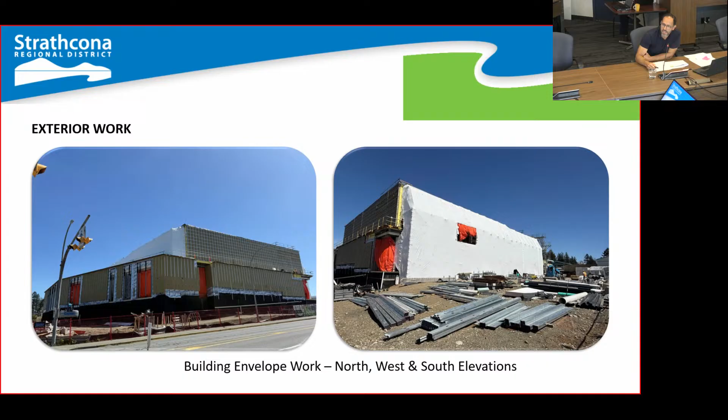The frames are about to arrive for the south side, and the windows are planned to arrive within the next 4 weeks, so a lot of work is happening on the exterior. You can see on the left side that the frames are being installed adjacent to Pinecrest and on the lower part of the natatorium.

Roof construction continues. We're 95% complete. The weather finally got better, so these guys are planning to come and finish all this work within the next couple of weeks.

The parapets are being built at this time, and drains are being installed, so soon all this work will be done.

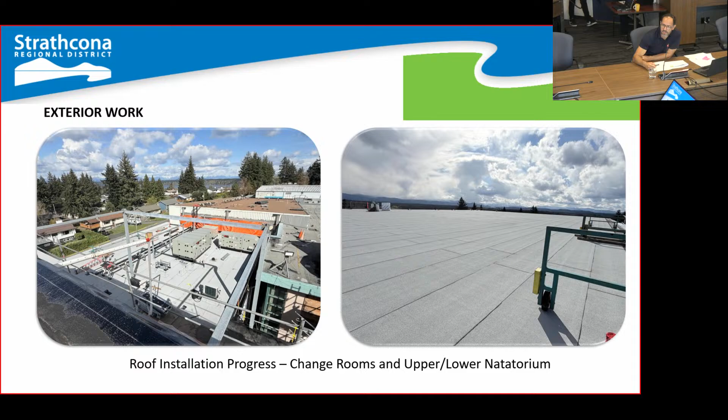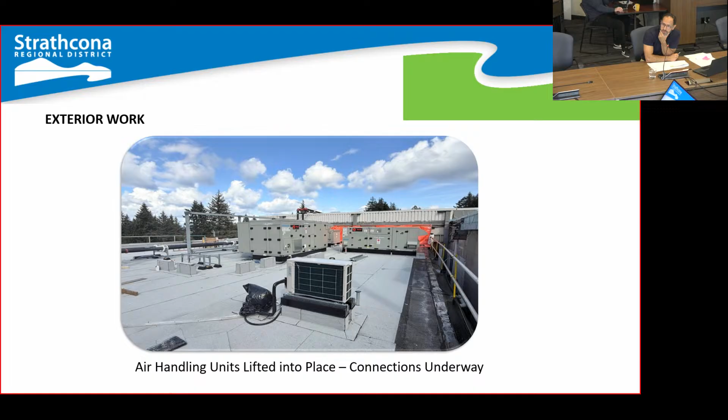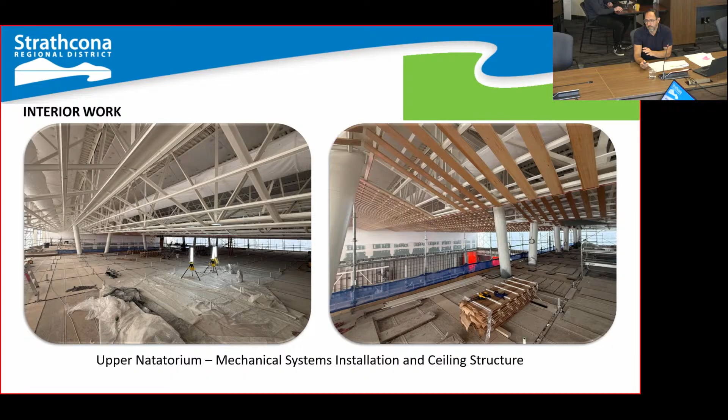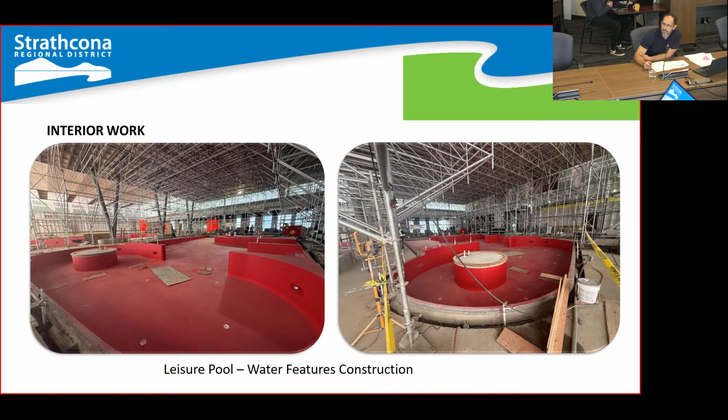Lessons learned from the lap pool, I'm going to speak about some of the issues we encountered and how things are getting resolved. This is going well, so the sequence has been changed. I anticipate that this pool is going to start getting tiled pretty soon, within the next week or two, no later than that.

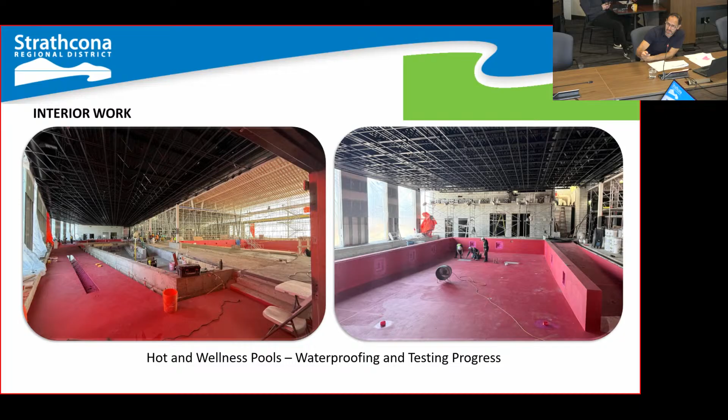I would say that it's really normal to find these kind of things, which is why we proceed with testing before we actually put any tile. After investigation, the leaks were detected close to the drains in the deepest portion of the lap pool. So they cored some holes, removed some of the thin set, and replaced the drains as well. The drains are holding water right now, so that testing is coming really good.

They're also working on plugging some of the penetrations for the light fixtures that go in the pools. They did that procedure with the wellness pool and it worked really well. Now they're following the same procedure here in the lap pool to hopefully rectify any of the issues we have. Filling this lap pool will happen next week, and we're hoping to get positive results so we can start tiling as well. These two images are both for the lap pool.

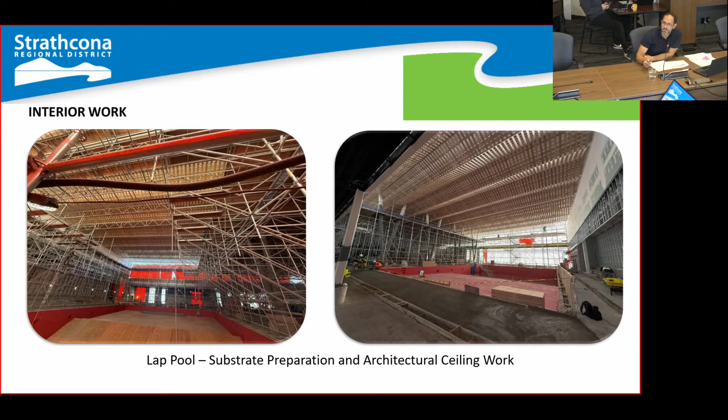You can see on the right photo that on the deck they're putting the thin set, that dark layer you see is kind of grout. I guess the goal is while they deal with all the leaks of the lap pool, they want to start tiling around the perimeter of the pool to gain some time. So they have changed the sequence. This is not what they initially had, but they had a plan B, and they are following that.

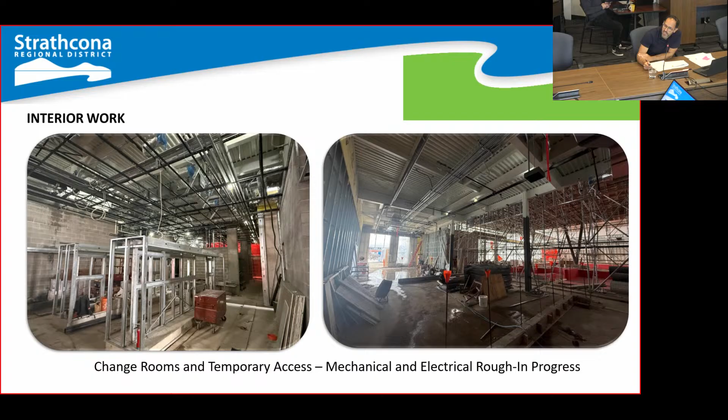In the technical corridor or basement, you have the opportunity to see the amount of work going on in these areas. All these spaces are filling up with all types of pipes. We have pool pipes, supply and return. We have HVAC ducts, fire suppression system, electrical, and a lot of the equipment related to the pool.

Some little packages for the pumps, heat exchangers, and the UV systems that will treat the water are under approval. We anticipate that all that is going to be on site within the next weeks and installed following commissioning.

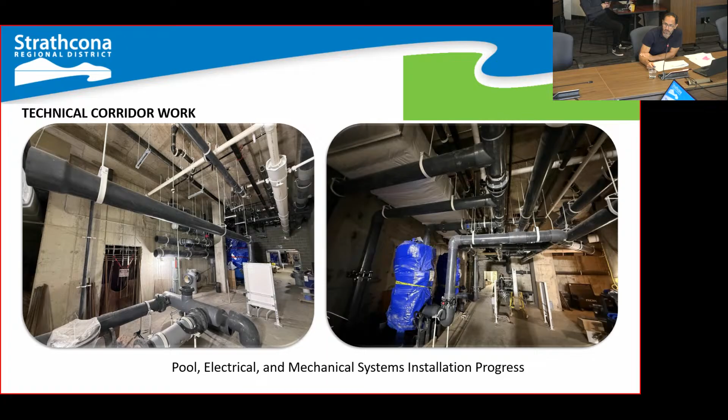I'm going to go quickly here through a lot of the work that is coming up because there is a lot. We only have 4.5 months. So curtain wall frames, anything related to those frames for the windows you saw in the first image I projected, that installation continues and goes to the end of June.

Glazing, all related to the glass, is scheduled to start this coming month in May and go through June. End of June you will see all those windows there. Metal cladding will follow as well, scheduled to start in June and completed in July.

That follows a test that has to be done with air tightness, which is something we have to procure and hire a professional to do the testing to make sure it meets the requirements of the energy model and the requirements of the City of Campbell River. Then we have the lower and upper roofs, the parapet, scheduled to be completed mid-May, so that's coming up in two weeks. Mechanical rooftop equipment lifted and connections completed towards the end of June.

The tile installation for the hot and wellness pools is scheduled to start in May and be completed end of June. Hot and wellness pool acoustic panels and architectural ceilings start late May and completed in June. The lap and leisure pool tile starts in May, also completed in early June. The change rooms work is progressing, scheduled to be completed mid-July.

Thin set in the pool deck is progressing, with tile completed in early July. Drywall and painting for the natatorium is underway and scheduled to be completed by end of June. The entry vestibule mechanical and electrical finishes will be completed in mid-July.